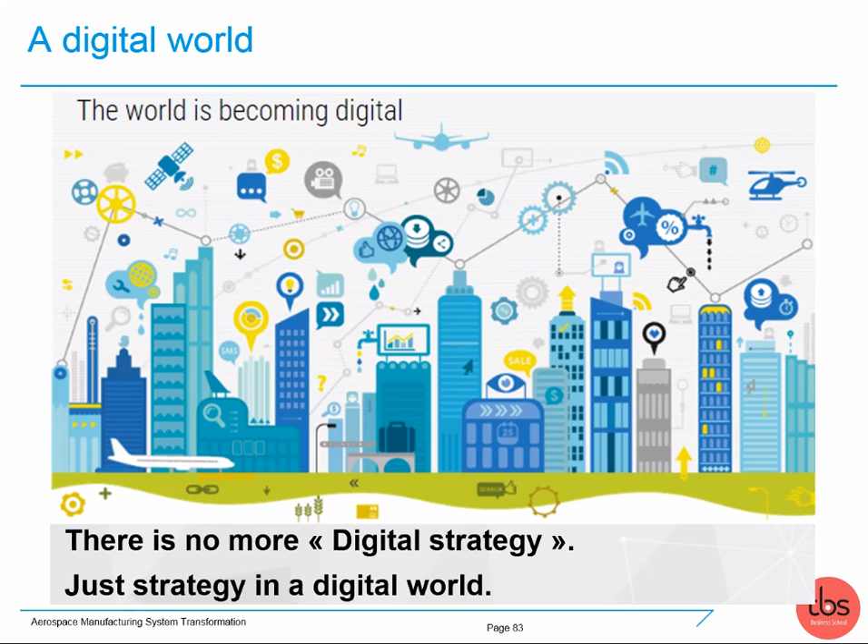Why do we have this? The starting point is the digital data, 1.0. It has three main features. It has integrity. You can copy it, you can replicate it, and you can send it, transmit it to someone else.

Because of these three features, the digital data 1.0 is taken in an acceleration and transformation that goes through the growing ways to connect people and objects. There are more and more physical and living bodies that are connected to internet. Human beings, objects and human beings that have an internet connection.

Besides this growing number of communicating points, there is a growing processing power. When I say growing, it's growing exponentially. And also, we are having increasing behavior in sharing the data. Not only people, but also machines. Machines are more and more sharing the massive flow of data that is fabricated, that is generated inside the machines.

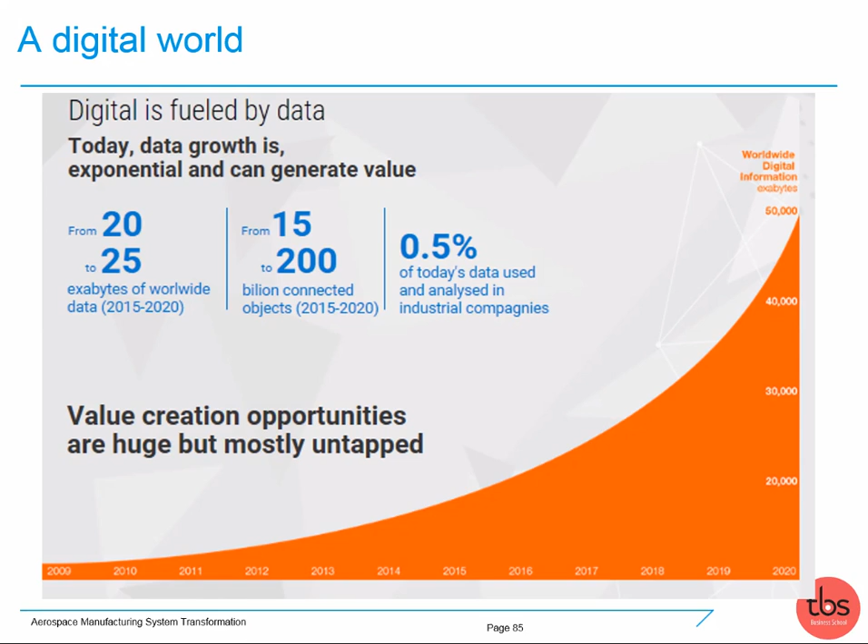And second, the growth is twice. The growth of aerospace is 5% worldwide. The growth of digital is close to 9%. So one thing I'm sure of is that it is a market that will have tough time one day. It's definitely not sustainable the way we are growing. But anyway, that's how it is today. Exponential growth in the sharing of data, in the production of data, in the use of data.

What do we do with data in the factory? The first thing to do before talking about digital data, about digitalization, is to realize that in factories, there is creation of data. In industries, there is creation of data from what I would call IT master systems, in opposition to slave systems. Digital tools are slave systems. They capture the data, they transmit, they copy, they share, they don't create, not digital tools. The tools that are creating the data are the IT master tools, which are designed to make specific transactions in the industrial company.

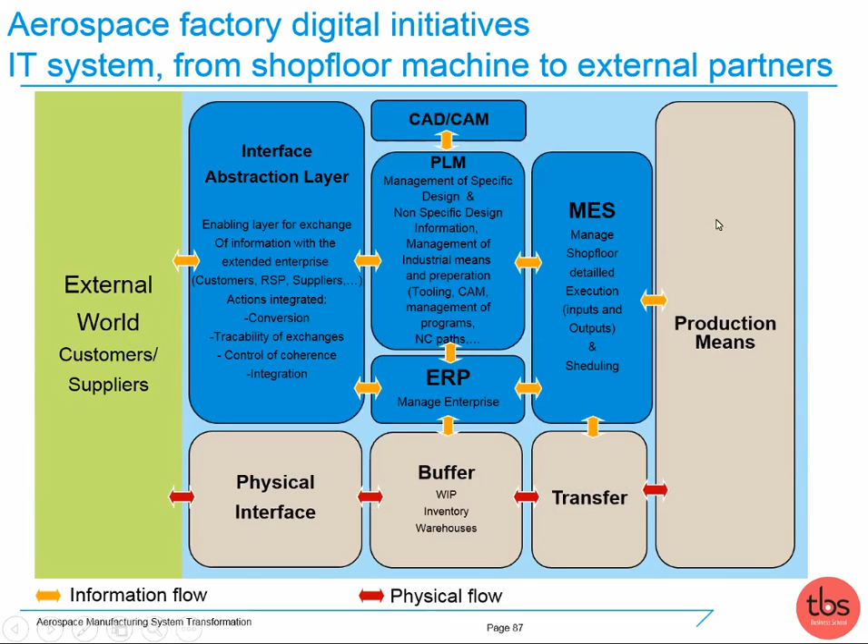So where are the digital tools? The digital tools are more of a layer on top of all this, helping to capture the data. We'll see that later on.

Another illustration of an IT system is this computer assisted design, computer assisted manufacturing chain, which enables moving from a CAD model, a virtual 3D model of a product that doesn't exist today, down to the production of the first part with 100% conformity. This is made by a combination of different IT solutions we call CAD/CAM, nothing to do with digital. This is more than 20 years old in companies.

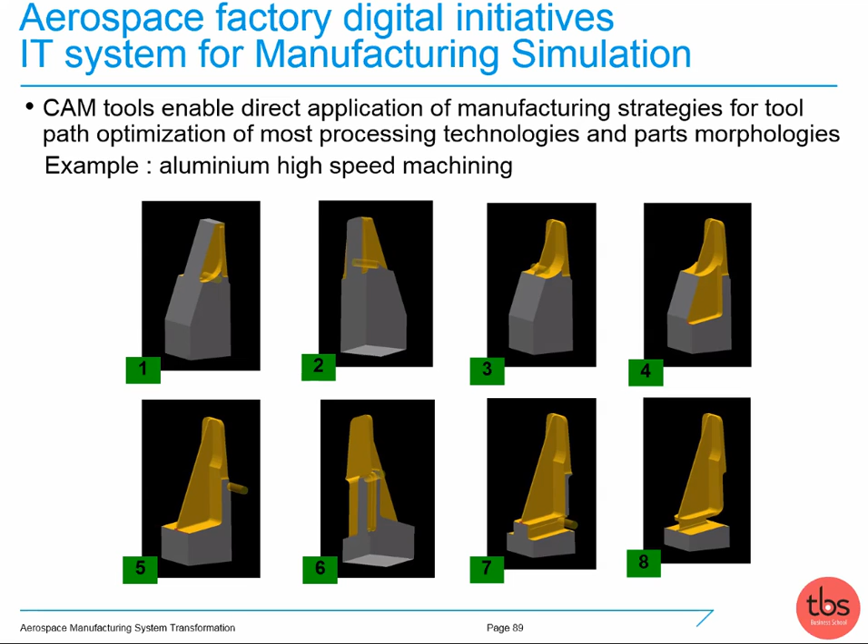This is an example of a software program that will machine this part, an aluminum bracket used to build airframes from an aluminum blank. You can imagine a piece of aluminum cut to this shape, and the yellow area is the progressive cut made by the tool, the small cylinder, in the NC machine. This is the result of a CAM, computer assisted manufacturing, software program connected to the CAD, computer assisted design, software, which enables moving from the product design to the first produced part.

Back to digital. Where is digital? First, if we consider the company, the center place of digital will be the product. So if we consider, for example, Boeing producing aircraft, the core of the digital way of working will be to develop and use a connected aircraft.

Around this connected aircraft, which enables the company to capture a lot of data, to understand, to improve, the company, Boeing, will build digital manufacturing and data analytics capability. This is very important because it's what enables you to understand and find ideas and improvements from a massive volume of data. If you don't have the analytics, you can't do anything. It's like looking for gold in a wide river. If you don't have the tool, you will not see the microgram of gold in the river. So data analytics is key.

The company will also build a digital workplace. These are work areas, which can be virtual or physical, where employees use digital tools to enlarge their working capabilities and get the benefit of digital tools.

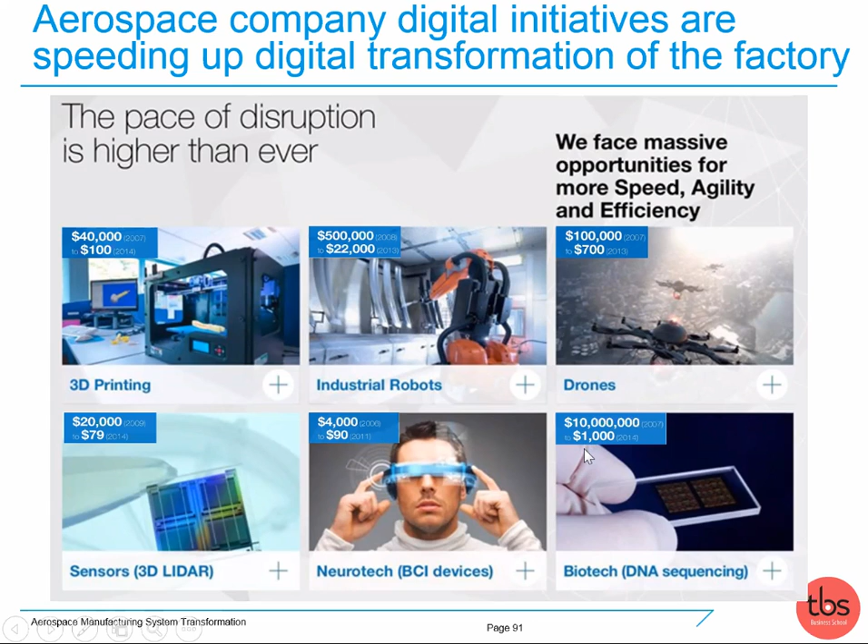Small example quickly. These are a few examples of price evolution between 2007, 2008, and 2013, 2014. So you can see that the digital objects are much more accessible to end users and companies. This is a small video of Stelia Aerospace, where you will see several digital applications at research level. It's 3 years old. It's not only digital application, you will see a few others, but it's a little bit of interest.

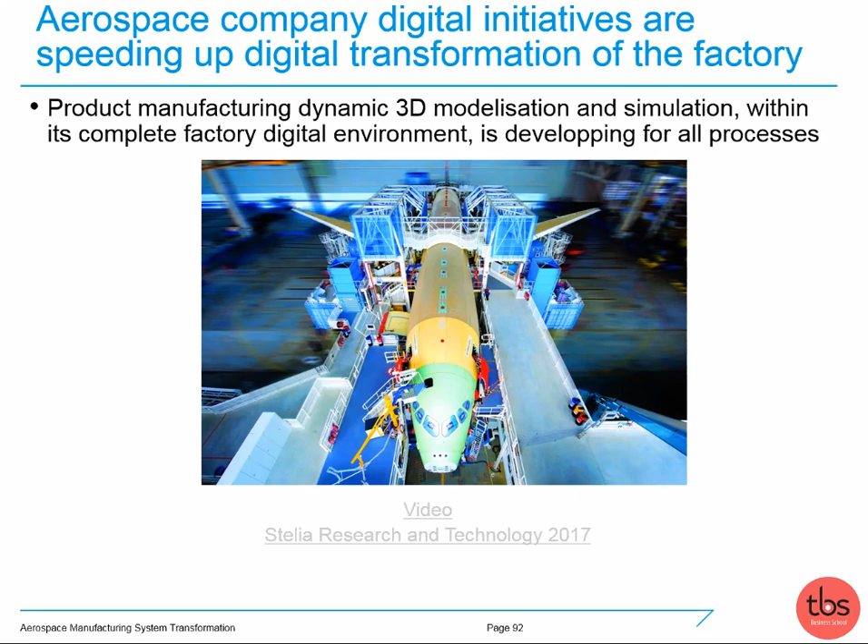Okay, so market-oriented factory. You can see the slide, is it okay? Back on your screen. Yes.

Okay, so how is the factory close to the market? First, if we go back to the master IT system I told you about, the historical tools of the industrial company before digitalization—those tools are not really communicating with each other because they are designed for monitoring very different types of data. Think about CAD/CAM, it monitors a 3D model, so it's really design oriented. Think about ERP, it monitors cost data, salaries, purchase orders, sales orders, stock values.

Nothing to do with each other—look at the data on your screen, it's totally heterogeneous data. Second, these tools are not analytics tools. You can't do analytics with an ERP or a CAD/CAM, it's not made for that. These tools are used to make transactions.

That is to say, for example, the designer, once the 3D model is finished, will validate, and this validation will push its model to a kind of email address in the CAD/CAM software of a colleague, who is the one having the authority to validate a design. Once this validation engineer has done its work by signing in the CAD/CAM system, it will be pushed to a third guy, for example, who will be responsible to test the load, to verify that the validated design part can be submitted to a static and dynamic load and not break, not have cracks.

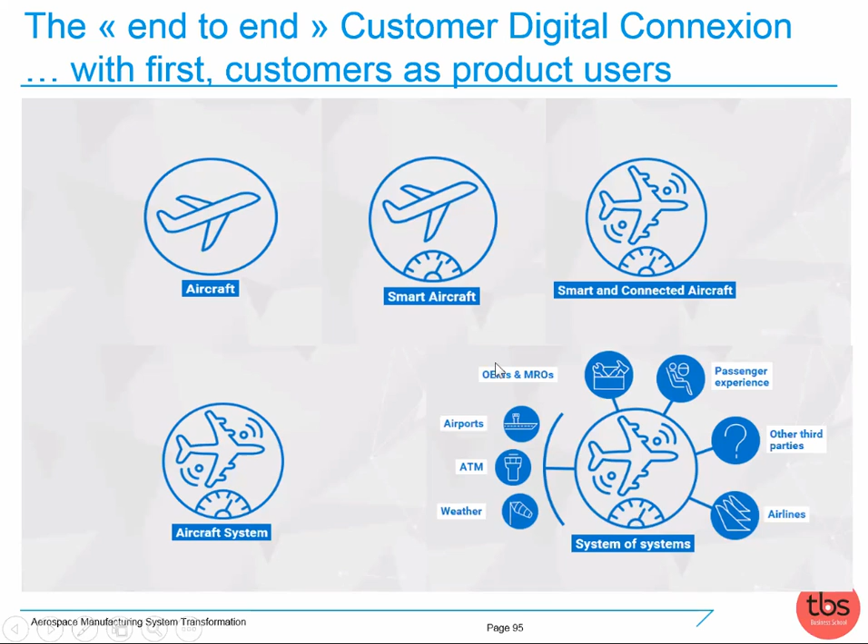It has become a smart aircraft, and now it has become a system of systems because you have a connected aircraft around a connected environment of different users, suppliers, customers of products and services who are themselves connected as well.

So this is enabling the whole industry ecosystem, from suppliers to in-life service organizations, MRO, to be interconnected with their data and to reduce the cost of friction.

Two years ago, Airbus estimated that in aerospace industries, if we were properly using digital capabilities, we could save close to $55 billion yearly. That's close to the revenue of Airbus Commercial. So it's big money.

How will a company take the benefit of this digital data? How will they save? We're back to the connected product.

It starts with the aircraft. In the aircraft, you have connections thanks to digital capabilities. So you can have a connected seat, a connected engine, a connected entertainment software.

All these connected objects are capturing data of activity, whether it's working or not, and data of efficiency, whether it's working well or not in an optimized manner, and many others.

And many other types of data. These data are a value to drive improvement, okay?

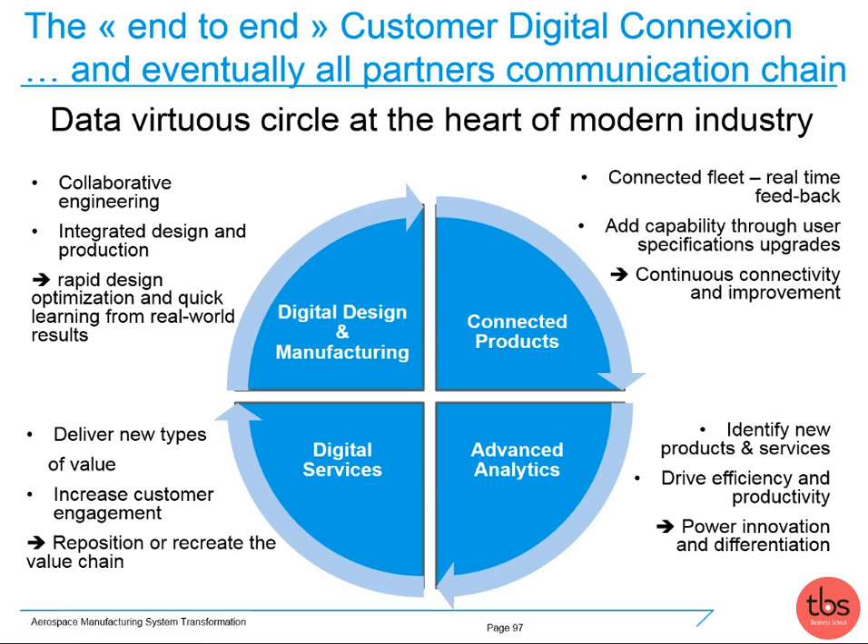It's just that it's enabling the product to be always improved in a fast manner, starting from market utilization.

In complex industries such as aerospace, these capabilities are likely to drive us to a way of working that we call digital twins. What is a digital twin?

Digital twin is a complete new way of development that uses 3D tools to empower industrial companies.

To, let's say, integrate the physical reality of products, plants, people, services with the virtual dimension of these same products, people, plants, services.

So it's like we would have two worlds. One is the digital world, okay, with the digital twins.

In this world, you have products, you have 3D models of aircraft - not one 3D model of a single A320 aircraft, but one 3D model of each and every A320 produced for Air France, produced for Air Asia.

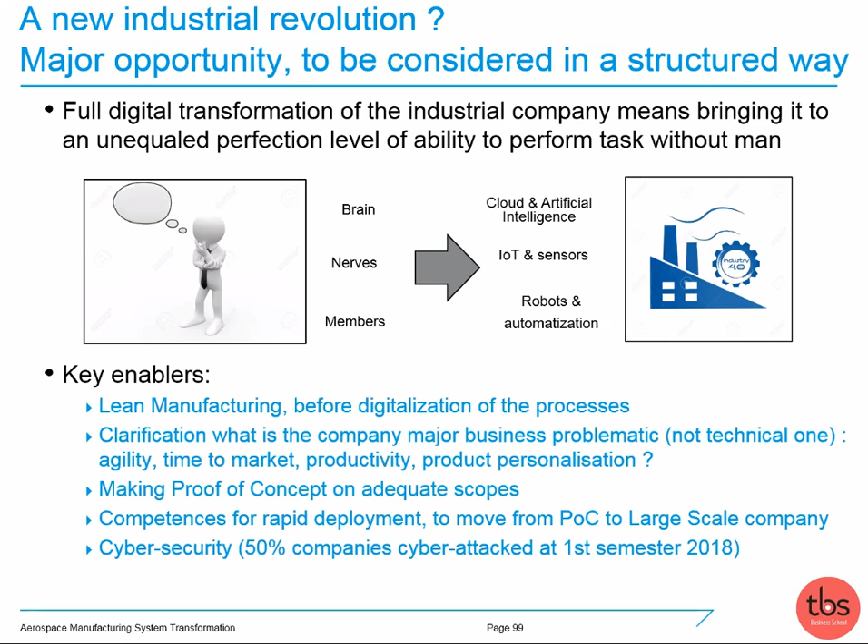And last but not least, very important: cybersecurity. We are logging a lot of data, but if companies are not protected, they will have tough times. This is a real threat, so it's an important thing to address.

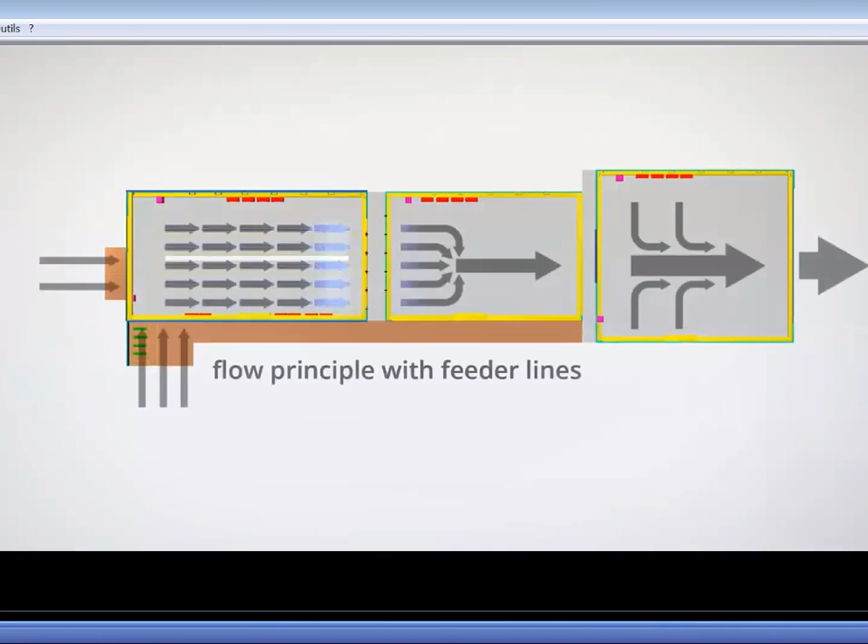Oh, sorry. It's probably... Are you still seeing the video? No, we are seeing your slide. Yeah, there's an issue, sorry. It's back. Is it okay? Yes.

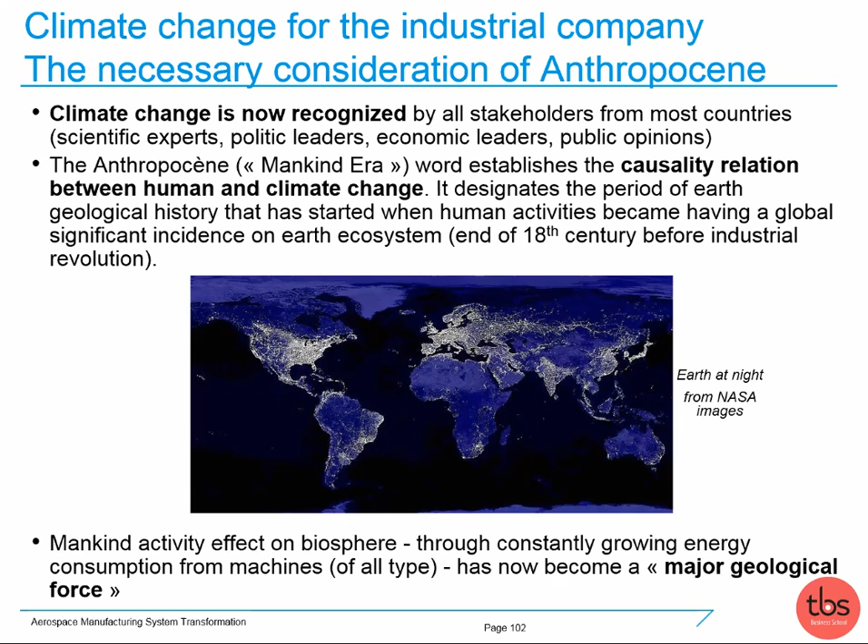The industrial economy that has been built over the last decades and centuries on a never-ending growth model, consuming resources from a finite world, is and will be affected. We have been taught, maybe some of you, I hope less, have been taught that economy is consuming labor and capital. That's wrong. There's one thing missing: it's also consuming resources, and resources come from a finite world.

Whether the resource is a mineral or energy, it comes from a finite volume that is our planet. So companies will be affected by this climate change, and this will come from various perspectives.

It can be damages to plants, to different investments caused by some climate event. It can be reduction of natural resources that are key to operate. For example, there are many companies, like nuclear plants in France, using cold water from the river for their operation. If the river level drops to a level that is not in line with their operation, they have a big issue.

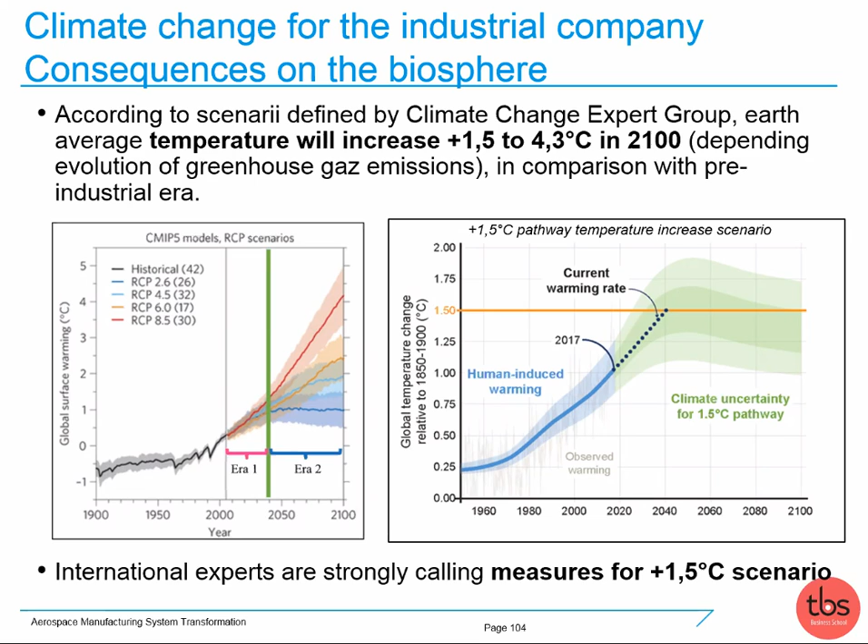According to the climate change expert group, today the different scenarios of temperature increase are between 1.5 and 4.3 degrees over 80 years from now, depending on the evolution of greenhouse gas emissions. All these experts are calling for measures to support a 1.5-degree scenario.

All of northern Europe, and northeastern Europe more precisely, was under a thick layer of ice. All of Eastern Europe was very cold and dry. This situation, only 20,000 years ago, had only a 5-degree temperature difference with today. So this illustrates how a change of 5 degrees affects the natural ecosystem and the climate of our world.

With this upheaval and the current Earth path, which is according to the 3.2 scenario and not 1.5, there are growing actors calling for strong measures: political actors, citizen organizations, and more companies coming to it. Europe, end of last year, has started to work on the Green Deal with strong measures calling for CO2 transitions.

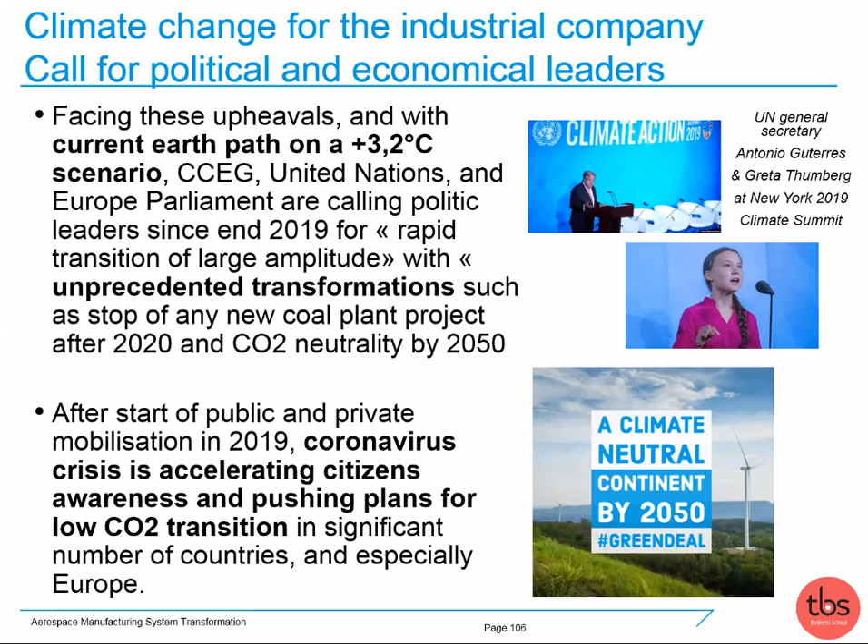Very recently, Europe has voted an increase in the ambition with a minus 55% target reduction in 10 years' time. It's not on the slide. Recently this year, Europe has finalized a budget for this Green Deal with a 750 billion euro plan targeting to reduce the carbon emission, the greenhouse gas emission, for many sectors.

And this is requiring society systematic transformation, because behind this reduction to reach the Paris Agreement target, we have the way we drive agriculture, we have the way we drive industry, we have the way we drive mobility. So this requires change of companies.

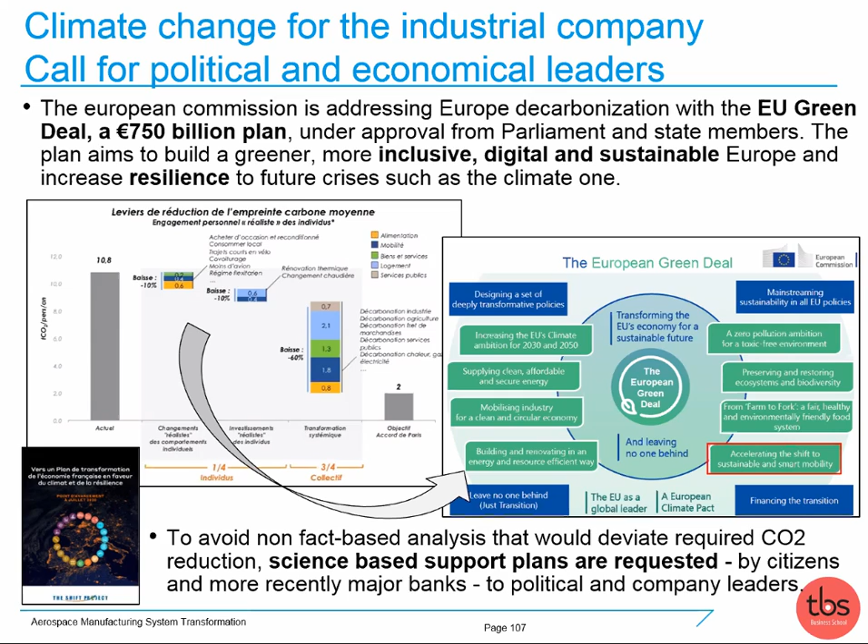And things are moving. I start to be optimistic thanks to COVID-19. It's incredible to say that, but believe me, thanks to COVID-19, the acceleration of understanding of some political leaders and some companies in France is 10 times more than it has ever been.

Second, once this is communicated to the database, the CDP organization is pushing the human organization to work on targets in order to reach the Paris Agreement by 2050. And they push to set up these targets with a science-based approach. We will have a video explaining what it is.

And once this is done by the human organization, this NGO is pushing to communicate publicly. This means that any human organization, think Total, Boeing, Toyota, any organization having communicated its data, its target, its work plan with a science-based approach to this CDP, in the last stage, this company will be pushed to open publicly to anybody, you, me, anyone, to access this data.

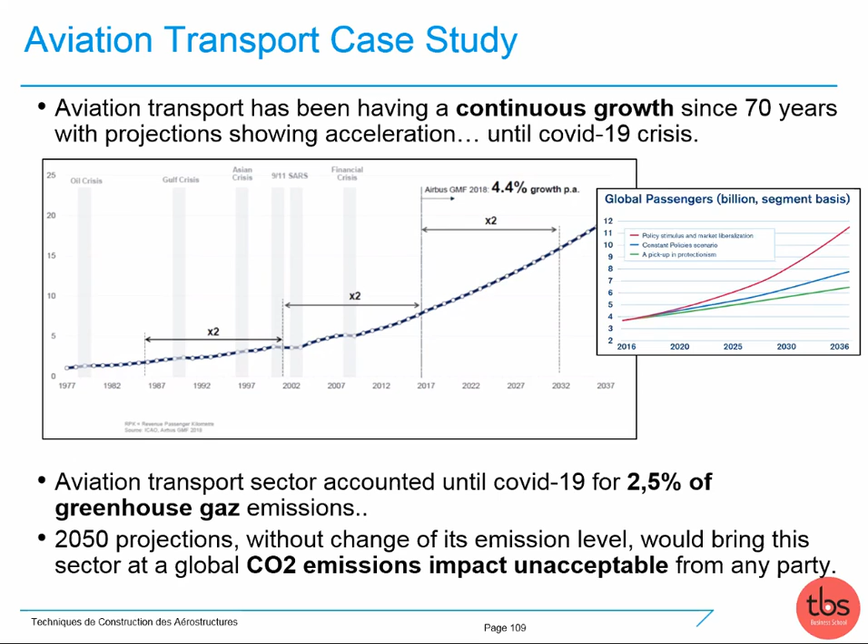Back to aviation. You have on this slide the growth between 1977 and 2037. You can see that every 15 years, we are doubling. This is a result of the 5% yearly growth of aerospace. This is explaining why today air travel has an impact, a contribution of 2.5% of greenhouse gas emissions. If we continue this growth over these 80 years, you can be sure that by year 2100, aviation will not be 2.5%. It will be much, much more.

This has been done through the use of improved materials, lighter materials. First came aluminum, compared to wood - not that much lighter, but much stiffer, so requiring less volume. Then we introduced composites. It has also been made possible through improved engines, and through the optimization of aircraft use, meaning aircraft are much more filled, with reduced empty seats than before. I'm not talking of the present year with COVID, of course.

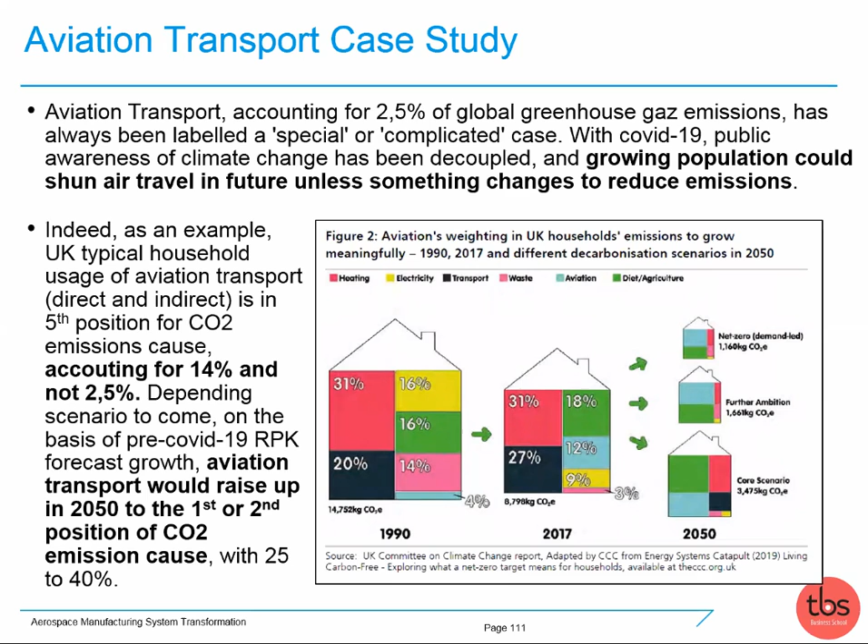Do you think the UK household will accept to live in a society where aviation is becoming the first contributor of CO2 emissions? No way, no way. So European citizens will push more and more, because the UK is typically representative of European households. They will push the aviation industry to change and develop alternative ways to reduce their GHG emissions. How?

You see on this slide, by the way, that if you compare with the other sectors, aviation is probably the only sector that still has an increase in emissions among the others. So how do we come to that?

It will require a new generation of solutions, both for propulsion and for the design and manufacture of the aircraft. Okay? At this stage, I am doubtful about

CO2 neutrality. Some actors are talking of zero emission aircraft. I consider that at this moment it is pure marketing. It's fine, it's good for marketing because it's pushing us to go to the lowest possible level.

Many companies, mine included, are always communicating a zero accident policy. We are 7,000 employees. Last month, for the first 11 months of the year, there were 28 injuries recorded in the company worldwide. We are talking of zero accident, zero injury policy for ten years now. And we are a leading company in the area of safety.

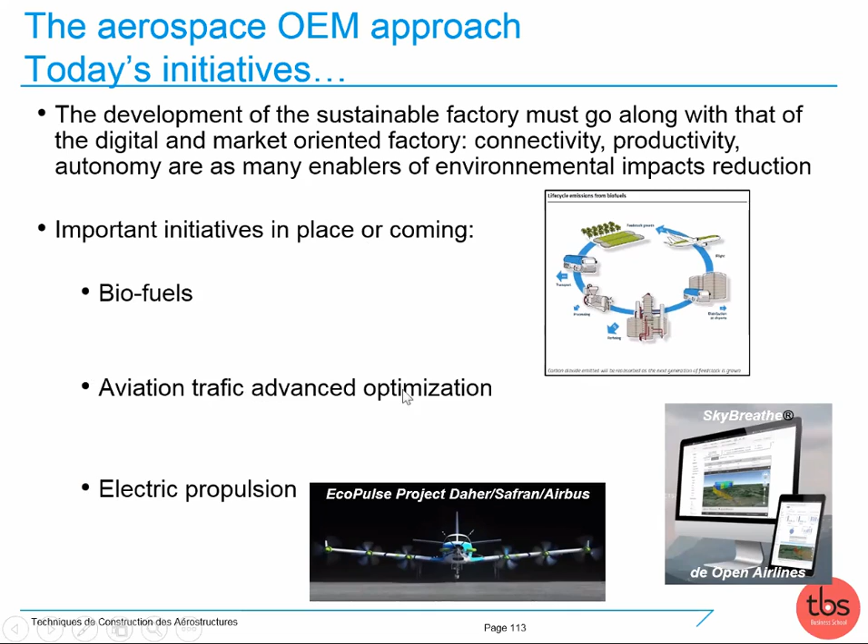Biofuel, traffic optimization, and propulsion like electric or hydrogen. What we do need to drive this improvement is to first accelerate the utilization of a powerful tool called life cycle analysis, LCA.

In French, analyse du cycle de vie, or ACV. It enables us to measure end-to-end the impact of the different players, from the early suppliers producing the materials, digging the ground of our planet to take minerals and transform them into materials, down to the end players that will retreat and disassemble parts of an aircraft after its end use. And in between, you have the air travel, the 20, 30, 40 years of an aircraft in utilization, the MRO services, etc.

We need to perform this LCA from an end-to-end standpoint with all the contributors. So it's not easy, because it means we will have the suppliers, the customers, the MROs, the airports, the airlines, all together to make this end-to-end measure and agree on what is priority, what makes sense.

Do we need to pollute with the production of material from the composite industry, because in the end we save much more during aircraft utilization, instead of reducing composites manufacturing and increasing aluminum manufacturing? Of course, my company would say the first alternative. But it's impossible to know if we are not working all together.

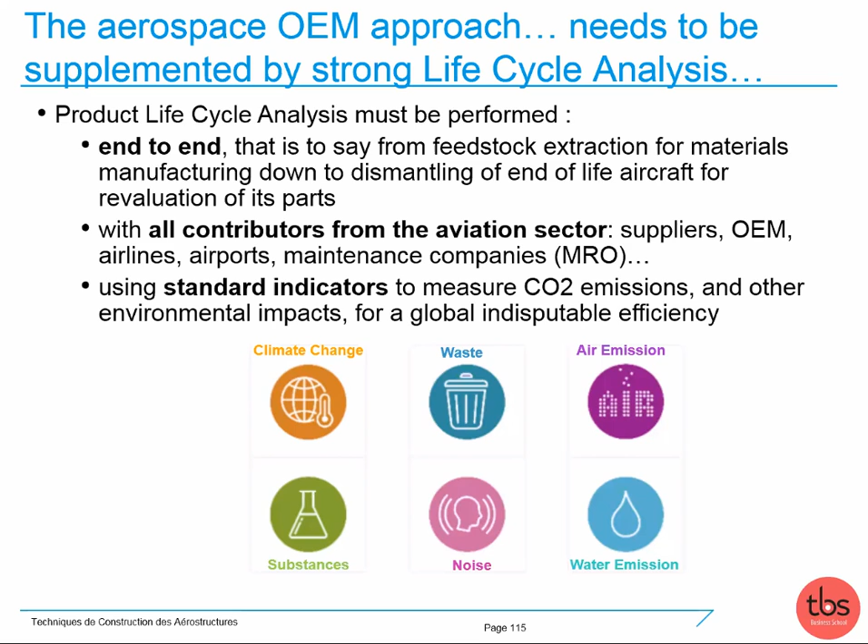We are pushing for ambitious programs. I will show you two short videos. The first is a research program on biological fiber that Airbus is running with AMSilk, which is a company. Will this come to reality? Frankly speaking, I don't know. It's a research program, among others, but it's interesting to know that such programs exist. I will also display a short video on the Zero-E aircraft that was released two months ago by Airbus.

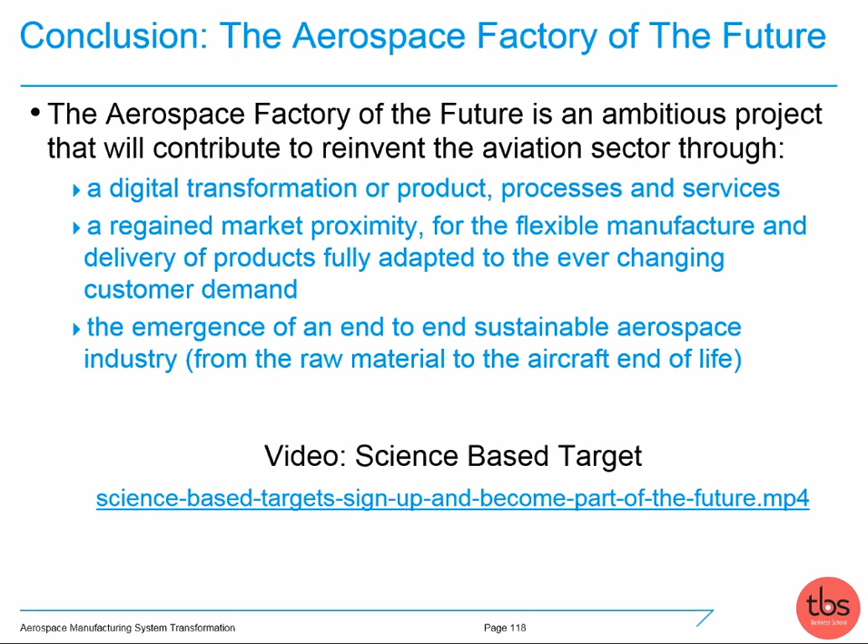So don't hesitate to look at this video if you want to know more about it. Okay, that's the end of my lesson, the third course.

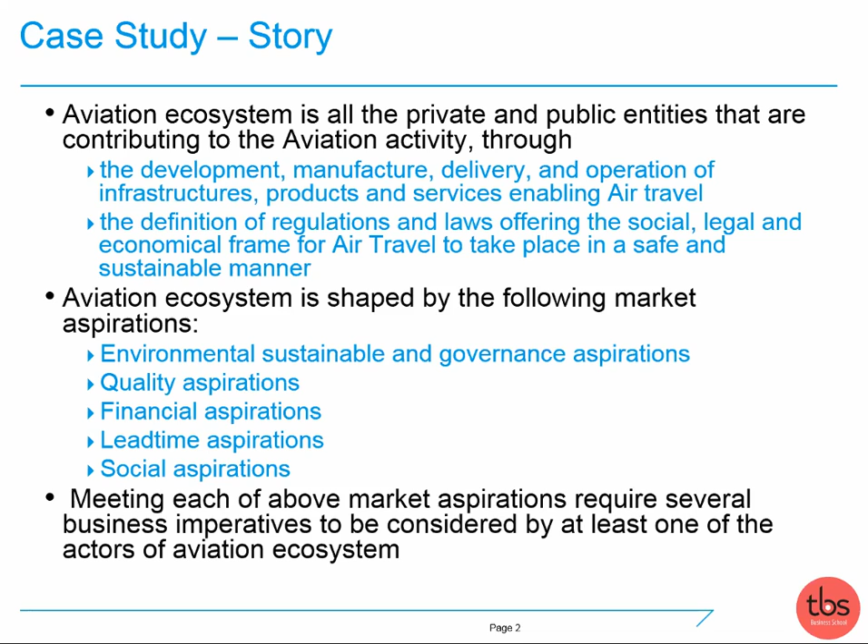Meeting those market aspirations requires considering some business imperatives for the different actors of the aviation ecosystem. These imperatives are very diverse. I have limited our case study to 15 of those imperatives, but each imperative is primarily connected to environmental, quality, cost, delivery, or social aspiration.

For example, in the environmental, sustainable, and governance aspiration, we have the Paris Agreement targets, reducing our CO2 footprint by three quarters in 30 years' time. Another example on quality: top class quality companies are trying to target less than 10 non-conformant parts per million parts delivered. This has been the norm for 20 years in the car industry between a supplier and a customer. We are not yet at that point in aviation.

In aviation, this year's target in the commodity of materials and parts, where my company acts as a supplier to Airbus, was to be under 200 ppm. Five years ago, Airbus's target was to be under 2000 ppm. So we are coming to it. It's acceptable to say that in 30 years' time, less than 10 ppm.

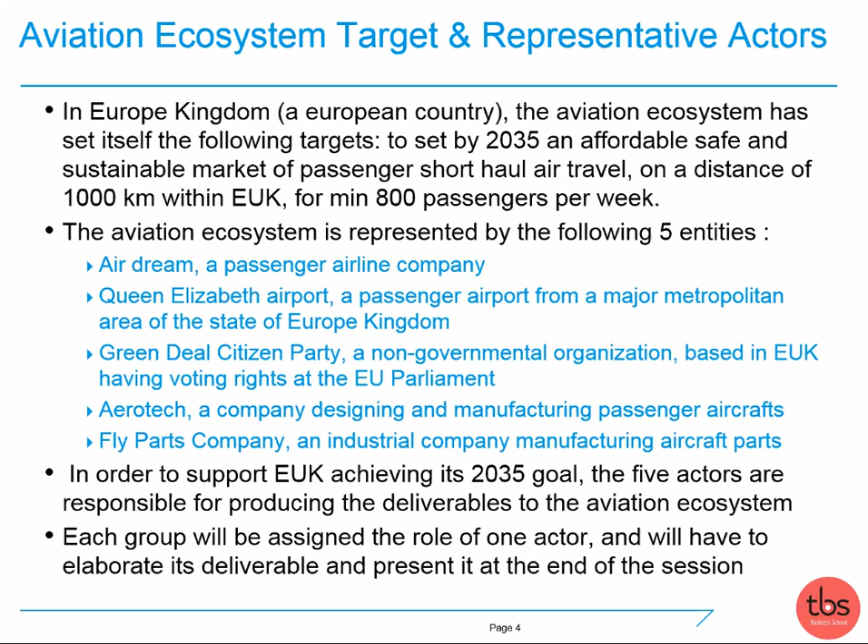How will we organize the work after the presentation? You will have an hour to work in your group.

After the 1 hour group session, we will have a 25-minute presentation, 5 minutes per group. For the preparation, I will move from one group to the other using the breakout function from Zoom. I will automatically create the groups, and it will be a random definition.

Each of you will be in a group of 4, 5, or 6 persons. You will first read and understand the document, which includes a PowerPoint template for your presentation, so you don't waste time creating PowerPoint documents. You will just type and upload a table in this 6-page PowerPoint. You will have one Excel file corresponding to your group. The 4 other Excel files, you don't need them.

In the Excel file, you have 2 sheets. One sheet is yours; you can do whatever you want, modify, type, copy paste. The other sheet is protected, and is the consolidation of all actors. So if you want to understand, for example, what QE Airport is having in terms of deliverable parameters, you can look in this big Excel sheet, but it's not necessarily needed. I will explain. First, you will read and understand this Excel sheet, and reread the PowerPoint if needed.

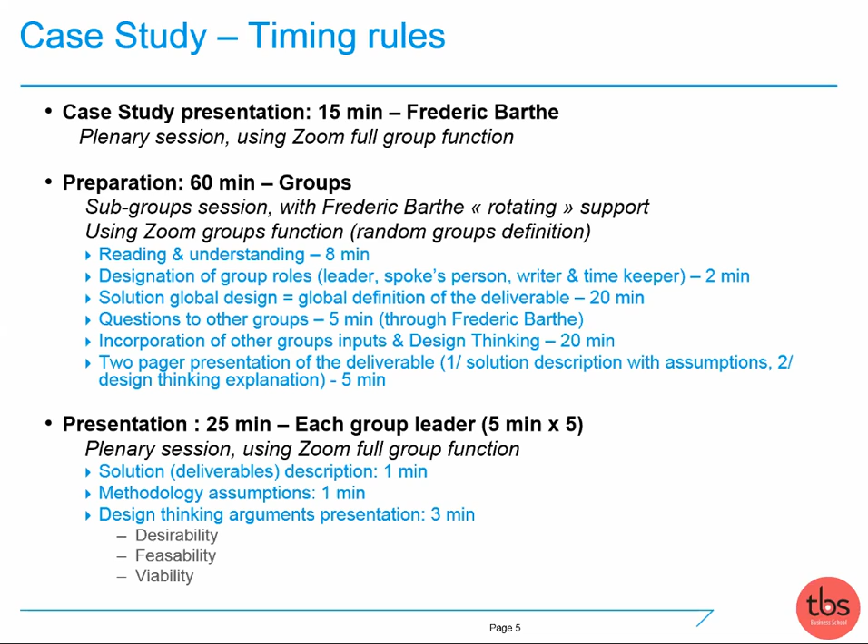And in the last 3 minutes, you will give the main arguments for why you consider your solution desirable, why you consider it technically feasible, and why you consider it viable from a business standpoint.

The deliverable that you will work out must take into account the business imperatives you may imagine. Those imperatives do not apply evenly to all actors. Some imperatives are common to several actors, some are specific to some actors, and some imperatives are primary, others are secondary.

You may decide to go for a solution that goes against it or in favor of it. Of course, the more you go in favor of the secondary business imperative, the better your solution will be in terms of desirability, feasibility, and viability.

This is a summary of the 5 groups: AirDream, QE Airport, GDCP, Airtec, FPC. This is their primary business imperatives, the major ones that are mandatory for you to consider. And this is the deliverable presented by the subgroup.

I will go very quickly because in any case I will come to your session and can give explanation. Citizen social class fly, and will deliver the passenger pricing model, defining the objects on which they will set the air travel price, and also things around associated passenger service. QE Airport will have to meet less than 2 hours from home to flight.

And will present the passenger mobility solution, so how the passenger goes from his home to the takeoff, not just the airport entry but the takeoff, and also what are the ground services for aircraft offered in the airport.

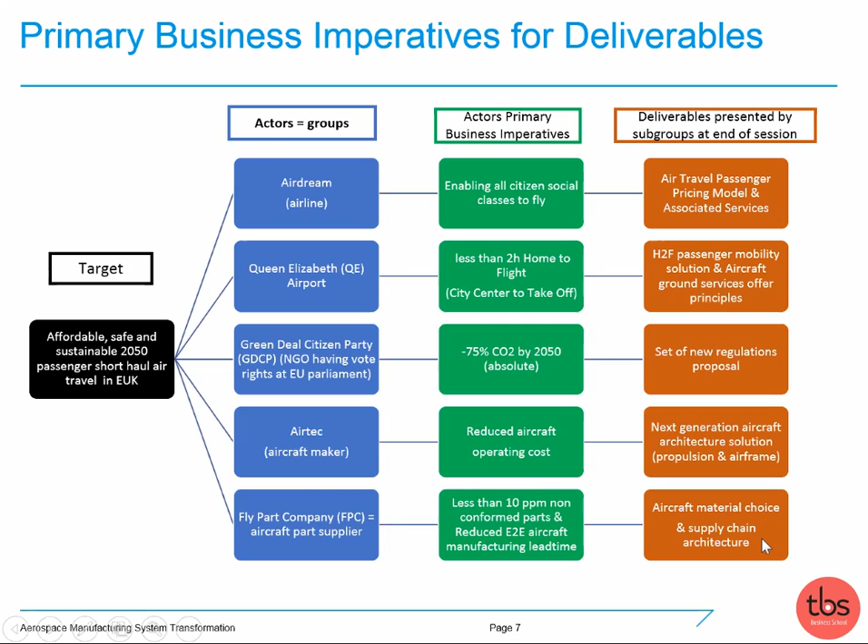And FPC will have to care for top quality parts, less than 10 ppm non-conformed parts, and a reduced lead time end-to-end between the raw material and the final parts produced. FPC will present the material choice they have decided, and the supply chain architecture.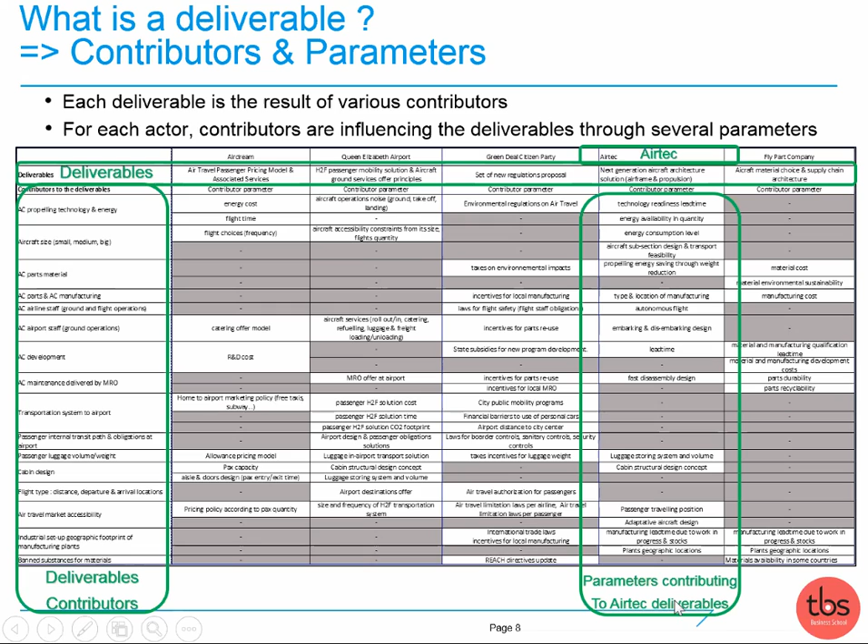Another example, on the aircraft part material, AirTech will have to choose the energy saving they target based on this choice of material. Meaning, when AirTech knows its material choice - wood or whatever - AirTech will set its target: I want to reduce energy consumption by minus 20%. So AirTech will work on this parameter, choosing among a frozen list of values.

This is the example with AirDream this time. In the case of AirDream, you have, for example, a parameter which is the energy cost, and you have 3 choices: electricity at 15 cents per kilowatt hour, petrol/kerosene at 16 cents per kilowatt hour, and liquid hydrogen at 5 cents per kilowatt hour.

So the group will just decide: 15 cents, 16 cents, or 5 cents. They decide for the cost - they don't choose the energy, they choose the target cost of energy. They will also choose the flight time, so their choice will be 2 hours or 1 hour 20.

Of course, the choice of time is related to the aircraft type. But if they choose 1 hour 20, AirTech can choose to go with a twin aisle or a single aisle. Of course, if they choose 2 hours, the choice of aircraft is implicit.

So, in the parameter list that contributes to the deliverable of each group, not all parameters are the same - either it is a parameter that is not common, so you're the only one to decide, or it is a common one, but it is still your decision.

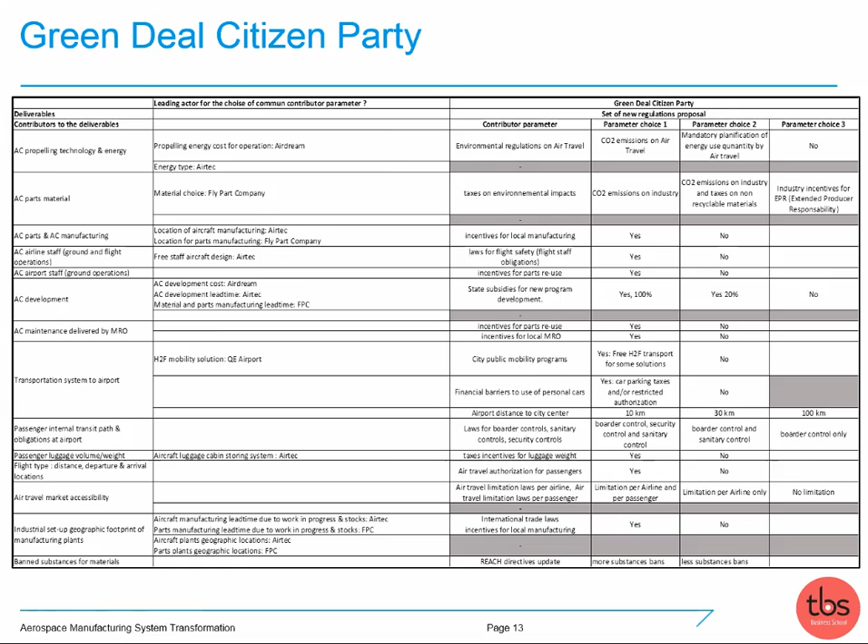Three, sometimes you have up to 6 choices. You prepare using the case study presentation displayed now, using the Excel sheet corresponding to your group, and you prepare with the 5 pages PowerPoint. You only type in the yellow areas to customize your version, and you will use it to present. Is this globally understood? I can move to the group session.

I'm sure you have not all understood, but I will explain deeper when moving to the groups. I will now split you. I might take 1 or 2 minutes to create the name of the groups with the breakout function. One last question:

How tight are you by 11:30? Just for me to integrate the constraint. It's just our lunch break, and then we will start again at 1 p.m. So I need to have your guidance versus a choice.

I spent more than I should have for explanation. So we have two choices: either we reduce the preparation down to 45 minutes, which might be tough, or we extend the session from, I guess, 15 to 20 minutes. What do you prefer?

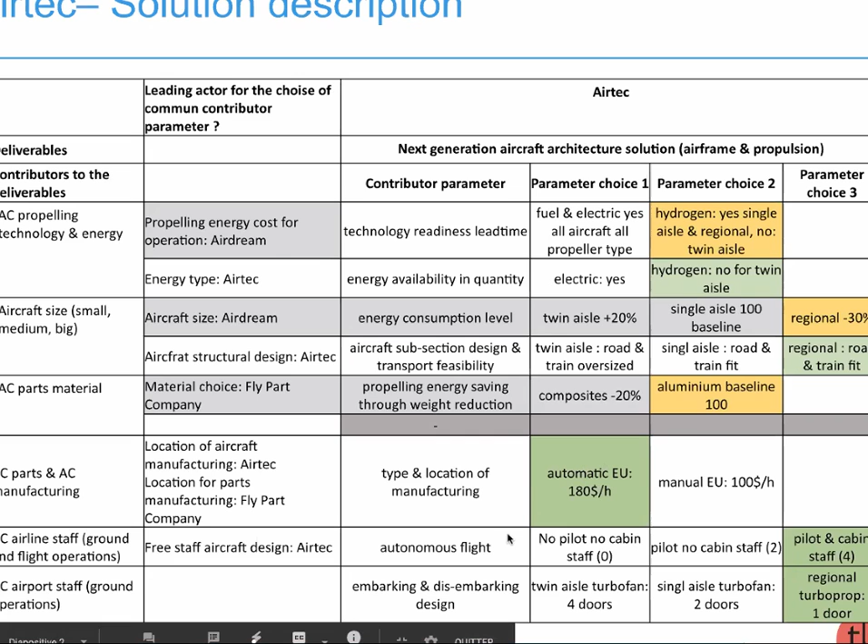I just need to find my box of innovation. And that's right, let's go next. After, what can I say? If someone in my team wants to share something, we can.

The big choice was in the industrial way, because we try to reduce costs as much as possible. So we choose to be just in time for the delivery and the stock. And on the geographic location, co-localized.

Does it mean that you intend to set up all your plants in Europe so that they are close to each other? Yes, right. So we will reduce costs about the shipping, about the manufacturing, etc.

It's also eco-friendly. And you have chosen the plug-and-fly cabin system, so that's very innovative, interesting. Though you have chosen aluminum instead of composite, so you are ready to consume 20% more energy to propel your aircraft. What's the rationale behind this?

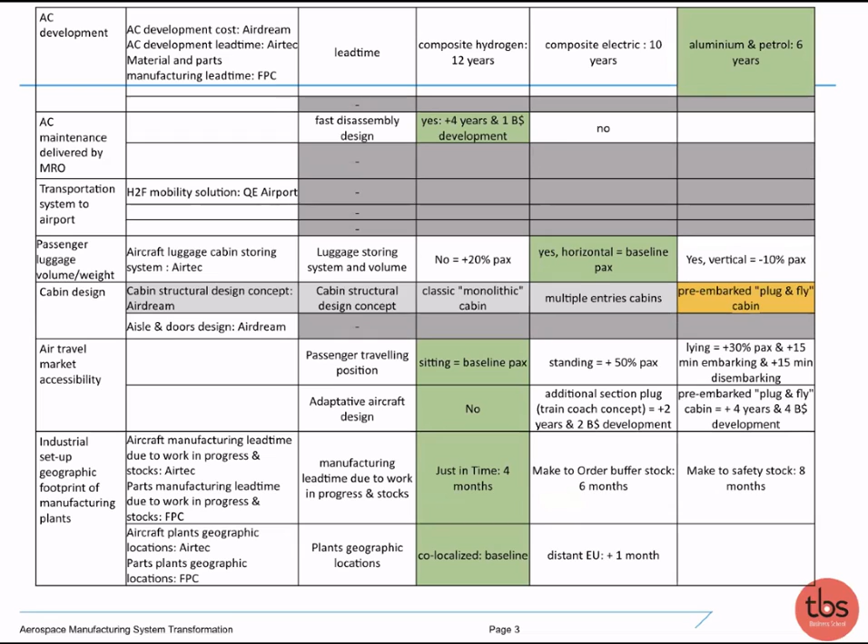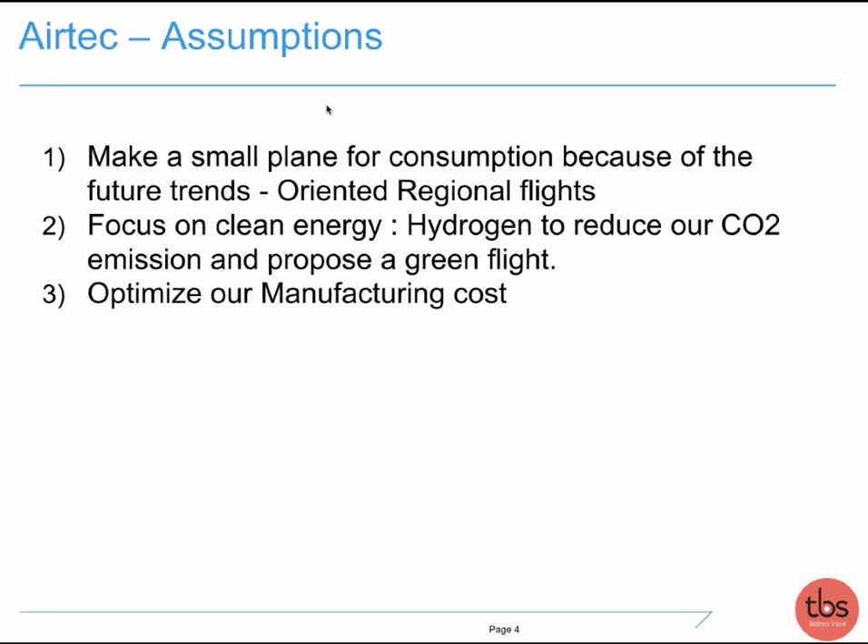But it's interesting. Can you give a few words on your design thinking element, if you have it? Not this one, right after. About design, for example. Move to the design thinking. We are in the part of design thinking. Can you quickly present?

Of course. As you can see, our choice was to be the less costly for customers and more eco-friendly by using hydrogen and sizing the aircraft accordingly, and also the way that the manufacturing is done.

About the feasibility, I would not talk much because we don't have time to do it. As we say, we just use the hydrogen power. It's quite new, so we don't know if it's going to be feasible.

It's not so new, it is used in space since many, many years, used as a propelling energy today, so it's not new. The difficult point is to develop green hydrogen energy, because hydrogen is existing today, but it's definitely requiring a lot of energy to be produced, and the emission of CO2 is made to produce hydrogen. Today, when you produce kerosene, you collect petrol from the ground, so there's very little emission. So the challenge is to develop green hydrogen, for you to keep in mind.

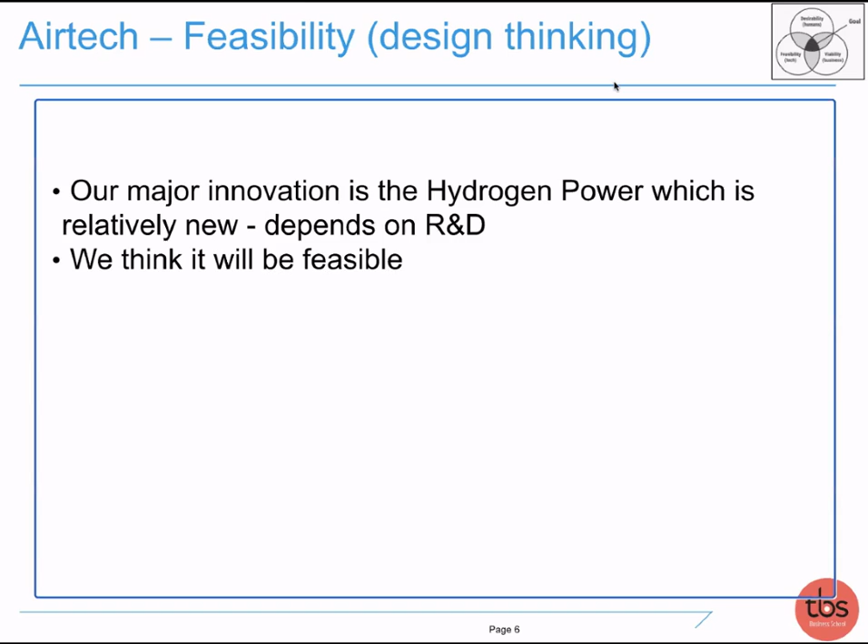Okay, next, thank you. And the next one is the viability. Maybe someone else wants to speak about it. I can speak about it. We thought about several points, and we took into account also the end user's point of view.

We haven't made enormous changes on the aircraft side. We thought about the fact that passengers could just stand during the flight, but actually maybe they are not ready for this kind of disruptive change. Also, the main objective of every company is to make returns on investments, and those models are already proven, they work. So maybe in a few years they will be still valid.

And also we saw that there is a new trend on the transportation, on the transport means. So trains, buses, etc. are very slow, and maybe a flight aircraft will just be the future of current travels.

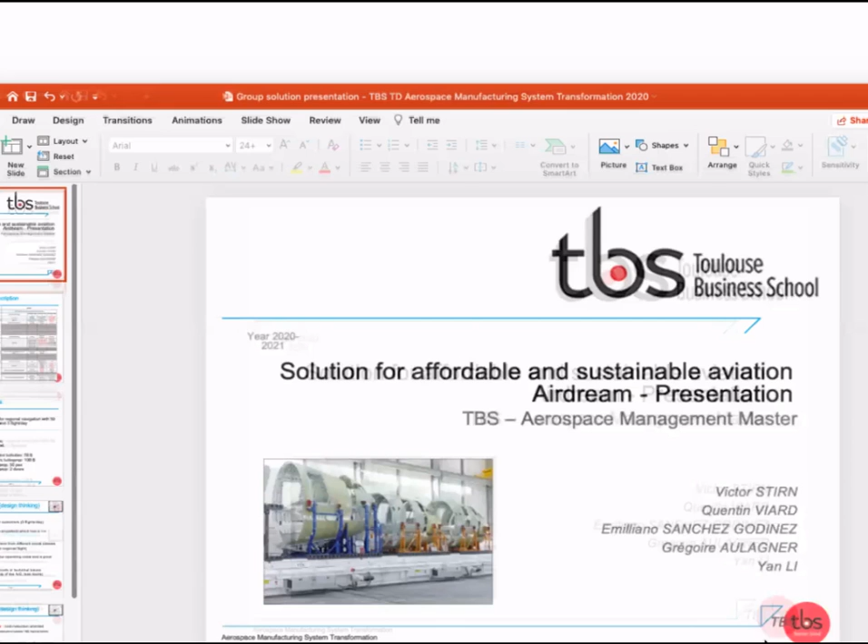Sorry, can you see my screen? Yeah, yes, so I will go. So we are AirDream, one of the best airlines in the UK, and to stay competitive, we will... so yeah, quickly, so to go quickly.

So yeah, we choose hydrogen energy for regional navigation with 50 pax, 2 doors, and a flight frequency of 3 flights per day. Here you can see more of our choice.

For desirability, first our 2 main goals are to reduce by 75% CO2 emission by 2050, and also enabling all citizens and social classes to fly. So first, with 3 flights per day, it's to address a large customer base and get people to take our flights. Then we choose hydrogen propellant to have a low impact on the environment and continue to be a very innovative airline.

Low-cost flights also for regional routes and for citizens, with a turnaround of 3 flights and 50 pax, we will try to reduce our costs. And also, for example, with just 2 doors and a simpler aircraft, we will try to have less risk for our operation cost.

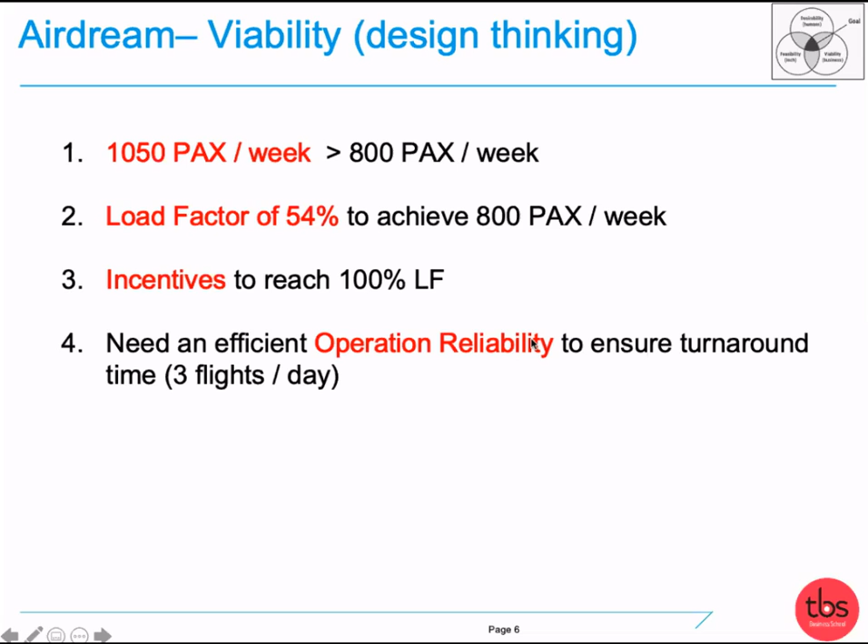And for viability, we will match, for example, for a week, more than 1,000 PAX, and the goal was 800. So it's more or less a load factor for a week of 54%. Nevertheless, we foresee that to reach this number, we will need some incentives to reach 100% load factor, and also to keep the pace of 3 flights per day. We will need to have very good operations to ensure efficient turnaround time.

Okay, thanks, very good presentation. Do you know the real difference of fuel consumption, kerosene, between an A320 and an ATR 72?

I could take a 737 and a Bombardier Q400, for example. The difference is 35%. So if you are an Airbus employee and you take the internal flight that Airbus has between the Airbus Toulouse plant and the Airbus Nantes plant, it will take about 1 hour 20 minutes, 1 hour 10 minutes to reach Nantes with the ATR. It's a propeller, so it's a regional flight with a turboprop propulsion system and kerosene.

If you take the same route between Toulouse Airport and Nantes Airport using an A320, your flight will be about 45-50 minutes instead of 1 hour 15, 1 hour 20. So probably 40% less time, but you will consume 50% more kerosene.

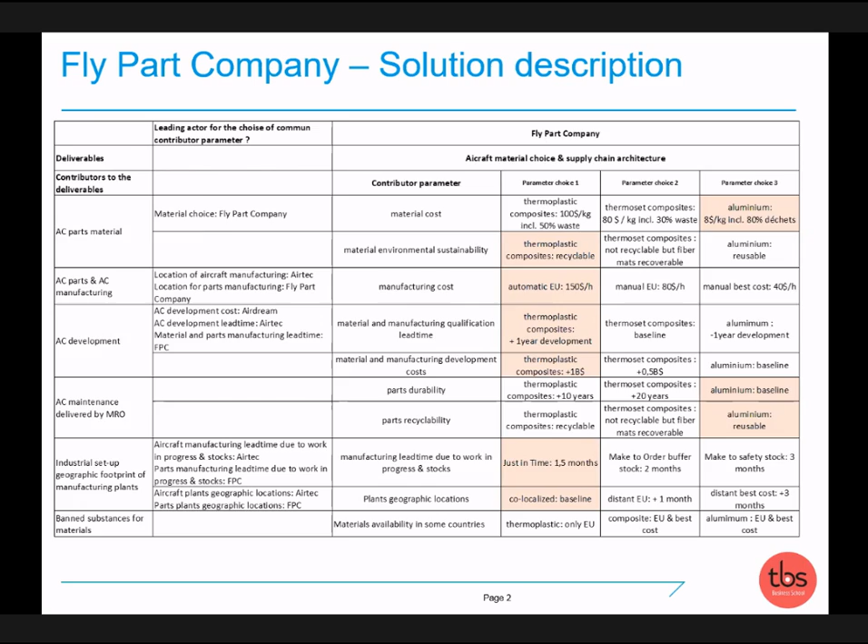Thank you, so as you could see, we choose aluminium because it's the most commonly used material now, and it's the fastest material to use in our manufacturing environment.

Sustainability-wise, thermoplastic composites are in development for the future, to automate manufacturing costs in the EU, to use less distance with our customers and for working. Thermoplastic composite development has the shortest manufacturing time, because the main thing for us was to be as fast as possible. If you have something to add, guys, I'll let you.

Just one question—I don't completely understand your double choice of aluminum and thermoplastic composite. Do you mean that today you design with aluminum, and later upgrade your aircraft with thermoplastic parts instead? Exactly, yes. Because right now we need to be fast, so we use aluminum.

And when it's gonna be... sorry, I have some issues with my— oh, I thought it was at my place. There was an alarm bell, but go ahead. Yes, it's my apartment, so I have to— guys, could you take my place just for a few seconds? I have a little issue.

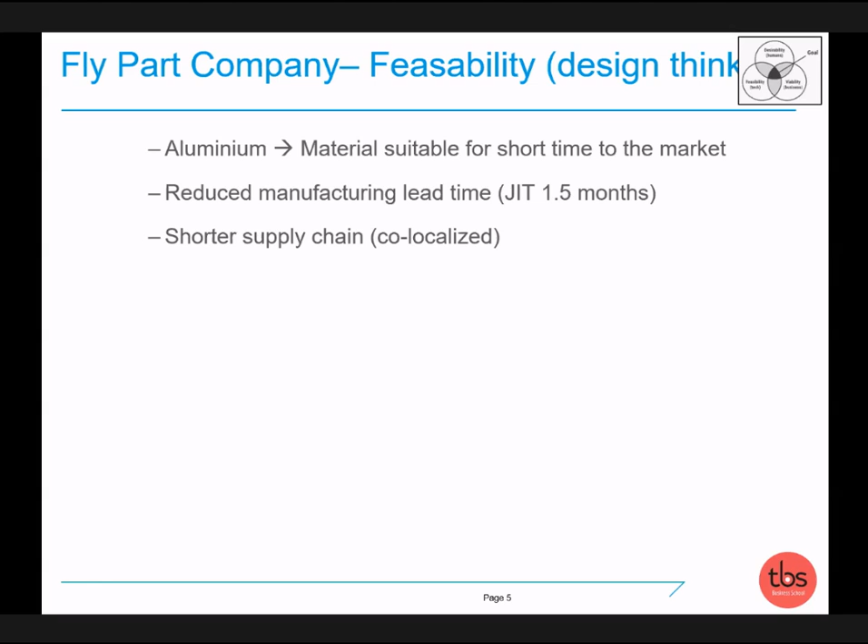Then for feasibility, aluminum was the most relevant product to choose in order to have a short time to market, so we believe this will enable our plan to be successful. Also, the manufacturing lead time is short because everything is localized, which will also be a factor in the feasibility of our plan—this will make the time to market very short. So these are all factors that make it successful. I don't know what else to say for feasibility.

And for viability: we thought that because part of the aluminium is recyclable, it will mean we have less losses, and we can reuse some of the aluminium used for production—this will make it more viable. Also, aluminium lasts longer over time.

Okay, good. Very quickly, if I may comment—good idea to think of introducing two solutions, one that can be fast on the market. We usually forget that time is key; when you work on a great solution, but it takes 10 years before being introduced, the renewal of the market will be much longer. When everybody says zero emission aircraft in 2035, let's assume we succeed—it will be the first aircraft in operation, but before we replace the 20,000 aircraft flying in the world, it will take additional time. So going fast to market is a very interesting point.

Second, for your information, thermoplastic long fiber composite is under research and technology today. There are ambitious projects, notably in France, with HAICOPAS—Charles knows, because we discussed it. HAICOPAS is a research program in France gathering automotive, energy, and aerospace sectors around the development of structural long fiber composite thermoplastics. One key interest of such a program is to develop recyclable composites, because thermoplastic resin is like water, whereas thermoset composites are like an egg—once the egg is cooked, you can't melt it back down by reducing the temperature. With thermoplastic, which is like water, if you raise and lower the temperature, the plastic melts and you can reuse it. That's one potential use of thermoplastic composite in the future—I'm not saying it's done, but it's one of the reasons we are developing it.

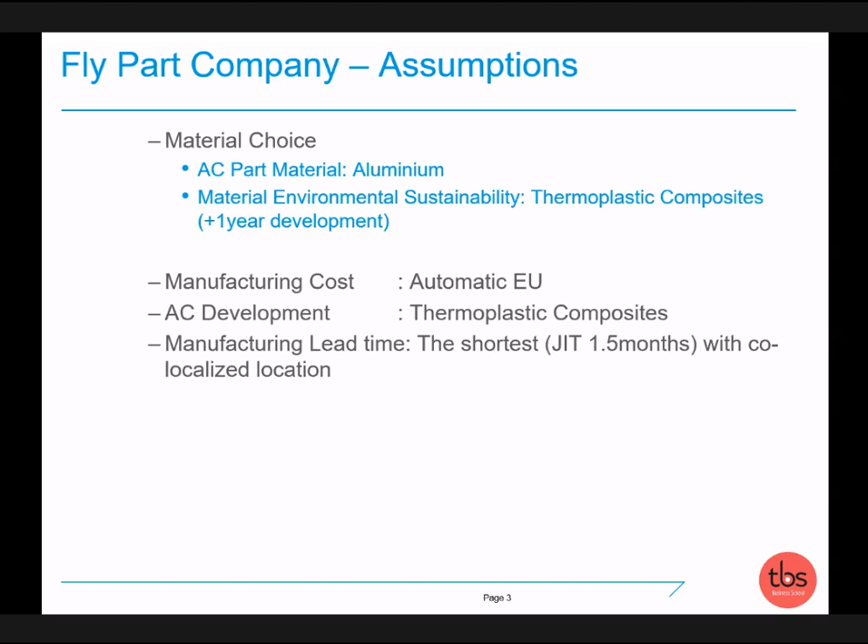Okay, next group, GDCP. Thanks again, very good presentation.

I'm not sure if you can share this, how you see the screen. Yeah, yeah, so...

So you are the GDCP leader? I don't hear you anymore. Sorry, I've been having internet issues.

So I'll just quickly run through. The team was made of Faustine, Julien, Sebastian, and Valentin, along with me. So these were the decisions that we made across.

Running through the individual decisions, we were supporting local MRO and parts reuse, definitely subsidizing for the development, and in terms of mobility, we tried to slash CO2 emissions and encourage the H2F program. In terms of local manufacturing, we tried to introduce trade laws which provided incentives for local manufacturing, and if more substances were used, there were bans on highly critical items which contribute to CO2, because that was the primary initiative for us.

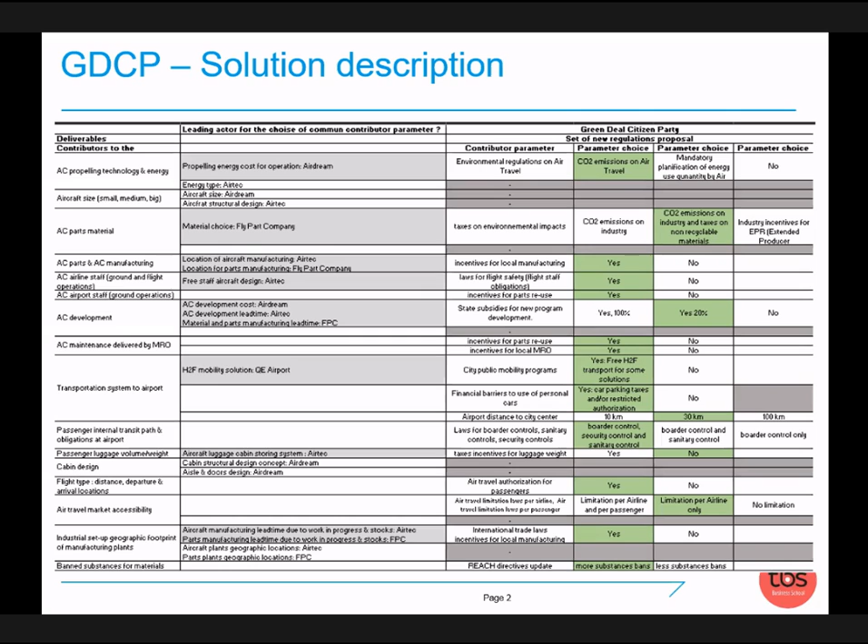The regulation of aircraft usage was already in place, and taxing the worst case scenarios and promoting local activities were other assumptions. In case of desirability, reduction of CO2 emissions in the entire value chain was very critical for us. We also tried to have more convenience for passengers, with public transport promotion.

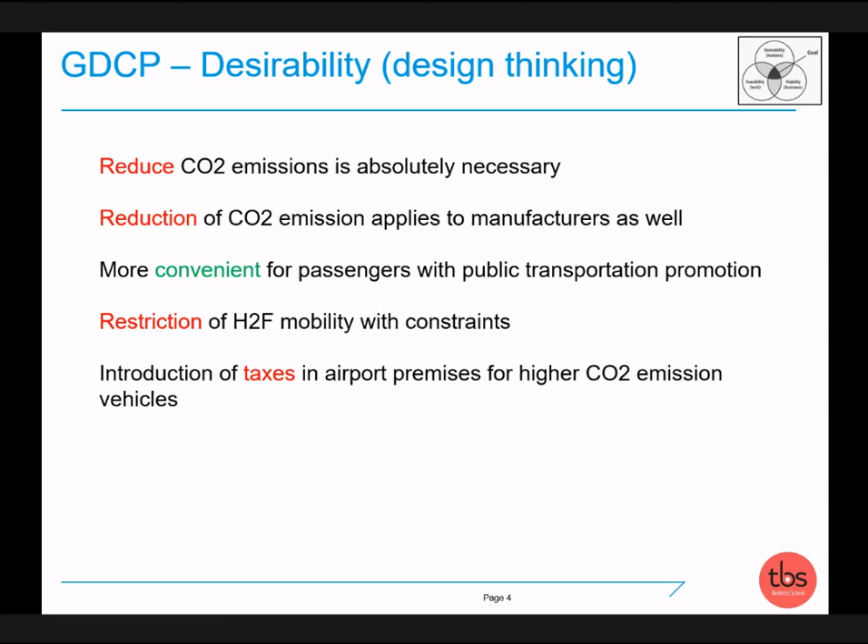Restriction of H2F mobility with constraints - this is more applicable to programs which involve diesel or other aspects like higher CO2 emission vehicles or programs. Also introduction of taxes into airport premises.

In terms of feasibility, the vision of 2050 should be executed in stages. We were a bit critical, as I said, that people are often drawn by the sustainability term, especially these days where air bashing and aircraft banning is very much high. We decided that high-speed train should be encouraged in case the CO2 emission reductions were not met during the initial phases of implementation, especially depending on the other players in the value chain, the stakeholders, like the part manufacturers, the aircraft actors, etc.

In terms of viability, more regulations on emissions will force companies to lead to innovation, which creates new jobs. Also supported by state subsidies, because we thought everyone went ahead with local manufacturing options. And unavoidable taxes fund the free H2F program that we created, because one player went with the cost, but we decided to make the H2F program free for passengers if it was green enough.

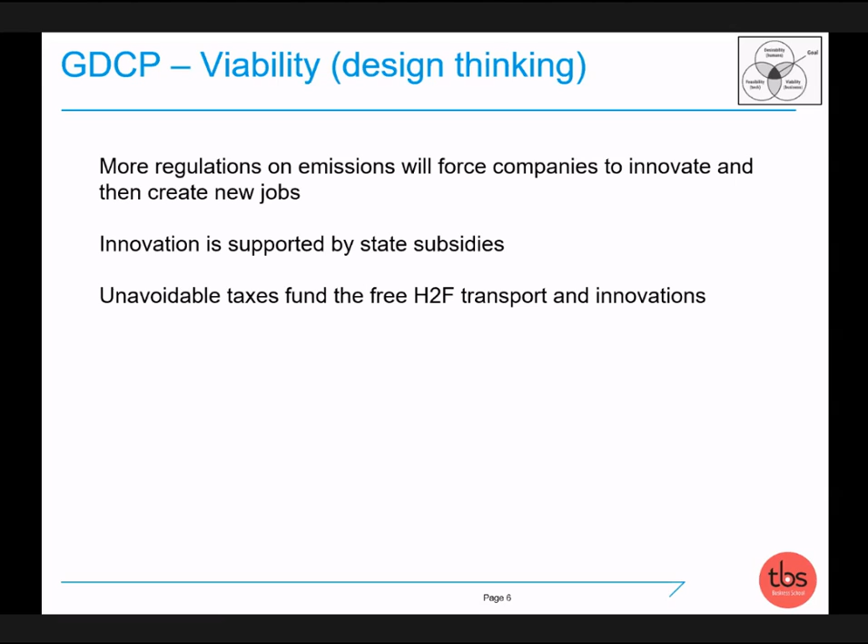So this is pretty much from our end. Okay, very well, thanks, good summary. Okay, last group, QE Airport.

We chose to focus only on maintenance for engines, so that we could provide less noise emissions from our aircrafts.

As for the mobility solution, we considered a fast direct underground, and thanks to the social incentives that were presented earlier, we are able to provide these services for free for our passengers. So we chose the fast direct underground service.

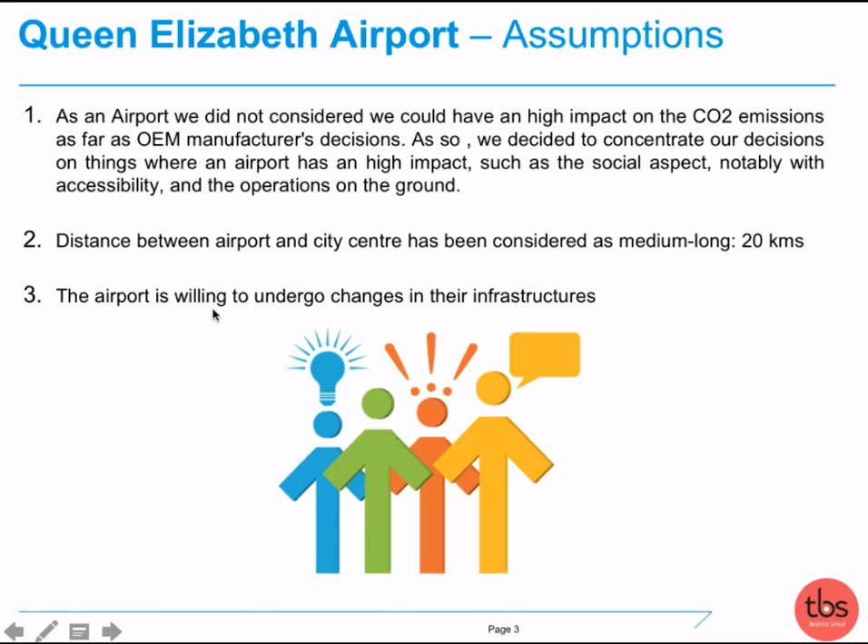So we focused mainly on accessibility and on our noise emissions. And we also assumed that the airport is willing to undergo changes in infrastructure, which could lead to some operational problems. So for design thinking, for desirability, we want quick transportation to airports.

So from home to flight. We want to reduce noise as much as possible for people nearby, and for passenger satisfaction, airline satisfaction, and for the social impact, the neighbors' urban footprint. And we want 100% accessibility to every social class.

That's why, with the accordance of the other group, we provide this. As for feasibility, we have to consider different things. First of all, we need to consider implementing the right technologies for our quality management and our maintenance.

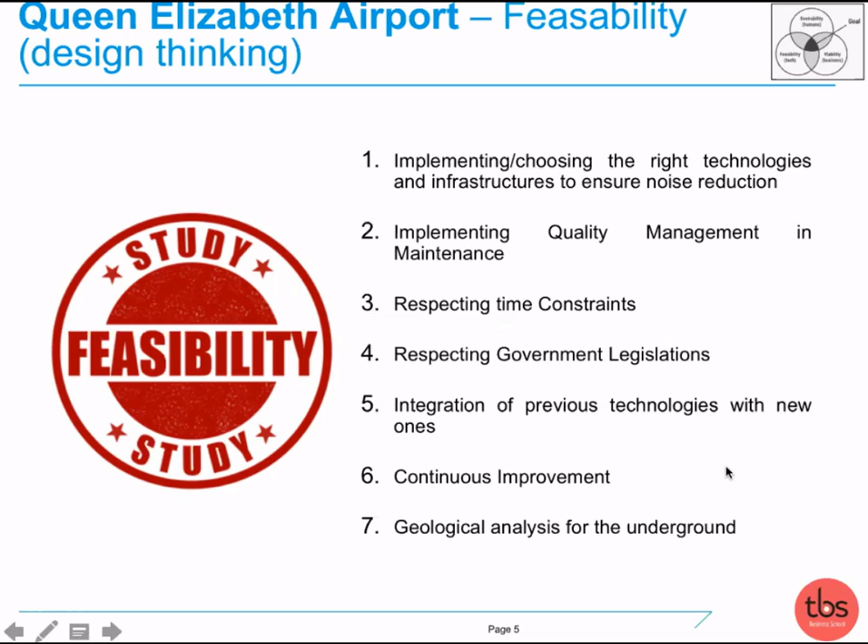So if possible, respect the time constraints for the flights and the frequencies, respect the government legislation, integrate the previous technology with the new ones, continuous improvement of our services is important also to keep on growing. And a geological analysis for the underground is important in order to build our underground network.

Finally, for viability, what we focused on is meeting the customer price expectations. So we want an efficient but also financially viable option. And the customer quality expectations, this is mainly for our airlines, so they want to come to an airport that is accessible.

And yes, so using digitalization, we could reorient our business strategy. Then our solution is dependent on the technical feasibility of both manufacturers and airliners, so this is important to take into consideration. And we want to respect the profit constraints in order to be a profitable organization and apply good supply management.

Very interesting, good, good. One comment on hydrogen. One question: what makes you sure that your solution is independent from the feasibility of hydrogen? In which part? In the first part here?

How will you refuel aircraft with hydrogen at the airports? Well, remember, it's an energy that needs to be at minus 250 degrees. This is true, this is a big issue, but we are considering implementing refueling systems.

So that would also help from the production of hydrogen, either through electrolysis or through steam. Will you favor production of hydrogen inside the airport, or will you have the production elsewhere and transport it in tanks to the airport?